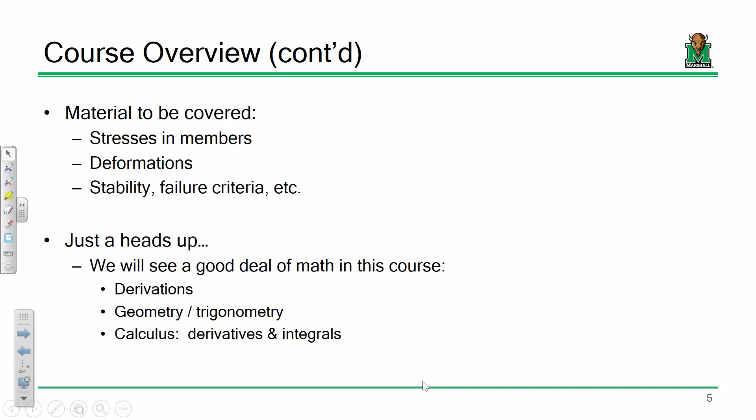So I just wanted you to be prepared for that, so when it's 8 o'clock in the morning and you forgot your coffee and I throw an integral at you, you're like, oh no, it's too early, I can't do this. Any questions so far?

All right, okay, let me pull up the syllabus because there's a couple things I do want to point out on it. Once it decides to load... okay, all right, couple things.

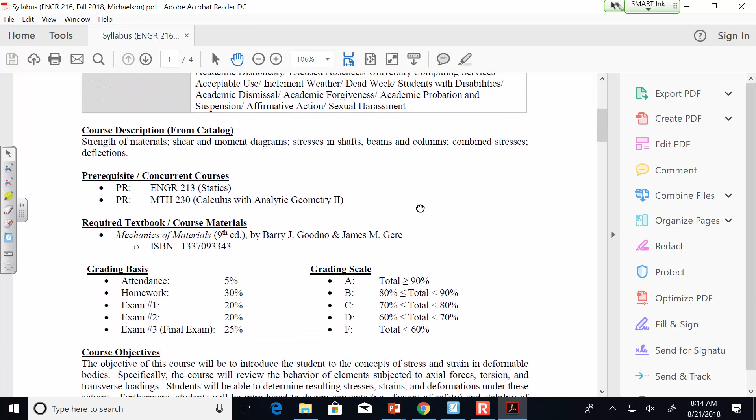So first off, when it comes to the grades, I round. So if we calculate your class average, your composite grade, and it comes out to an 89.7, you got an A, okay, so I round. And I say that because Blackboard doesn't, okay, because I have a column in Blackboard that'll calculate your class average, and if it calculates it to an 89.783, it'll say B+. So if that happens, well, hey, Dr. Mike said you're getting an A, don't worry, okay, so I round up to the nearest decimal point.

Now, if you have an 89.1, well, that's an 89 and that's a B, okay? So, but I do round up, okay? I'm usually pretty easy to get along with, and there is an opportunity at the end for a couple bonus points, and I'll mention that when we get near the end of the semester.

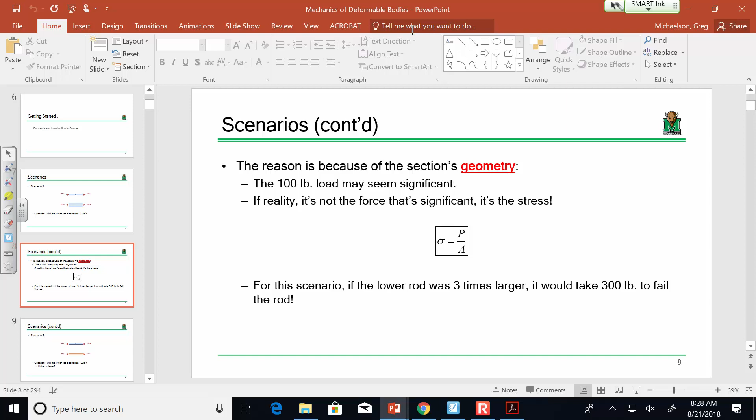Now that brings up the second scenario. I've got some numbers here too, but let me give you another example. Let's look at this. Now, let's say for the sake of discussion that these bolts are the exact same size. So in this scenario, I'm doing something a little different—I'm not dealing with an aluminum can and a bar where I've got elements that are different sizes. Now I'm taking the size, the geometry, out of the equation.

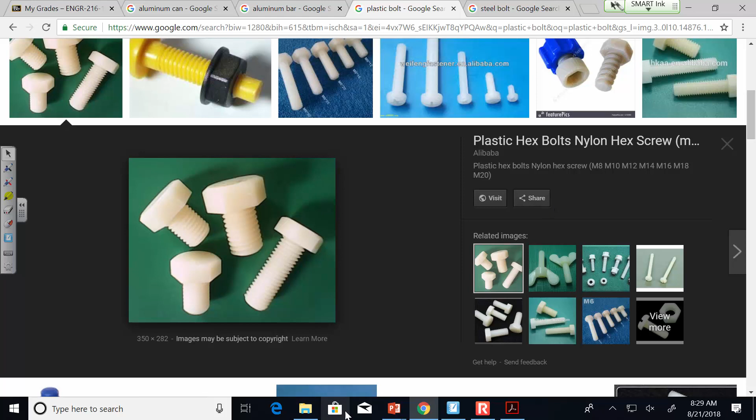Let's say we're talking about this bolt here and this bolt—let's say now that they are the exact same size, so now the geometry is the same. Which one do you think is going to fail first if I start applying load, the plastic bolt or the steel bolt? Plastic bolt, okay, and that's pretty common. Why is that? Because in general, you would think that plastic is weaker than steel, right? Pretty straightforward. So another thing that we have to deal with in this course is how we characterize material behavior—not just the geometry, but the material.

So let's go back to that scenario. Let's say I've got that rod of, let's say, blue material or what have you, and I load it until it hits 100 pounds and it snaps in half. Well, what about the lower rod? Is it going to fail at 100 pounds? Is it going to be higher or lower?

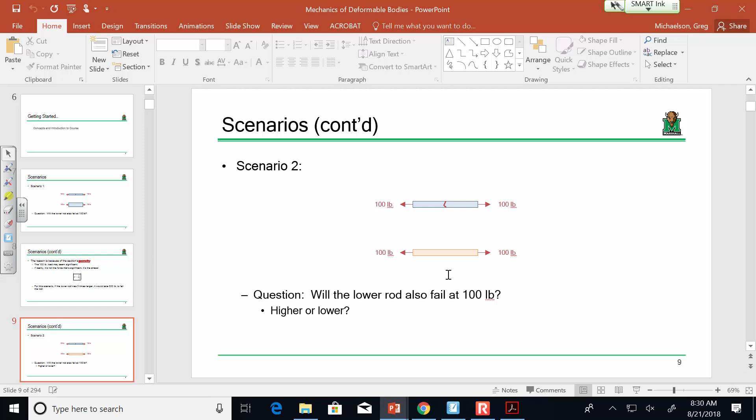Well, it depends. Is this plastic and this steel? Is it aluminum? Is it nylon? Is it what have you? It depends, okay? So the reason why it depends is because of the section's material properties. So material properties are going to affect how sections respond to load, and they're also going to affect how things fail.

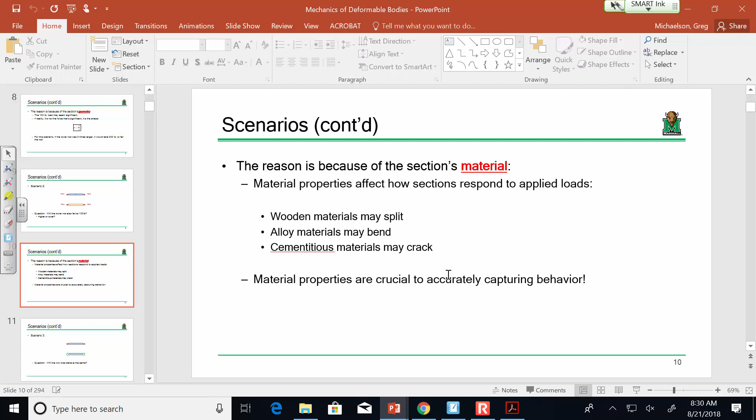Like, for instance, if I have a bolt, and just for the sake of it, let's say this bolt was made out of wood. Well, how would wood fail? Well, it would tend to split, like the fibers would split and it'd split apart. If it was made out of an alloy like a steel, it might want to bend or fracture. If for some reason it was made out of concrete, it would crack and what have you. So the way that that material behaves and the associated properties with the material are really important in capturing behavior, okay?

Now, another thing that's really going to occupy a lot of our time this semester is how are we loading it? What happens if instead of yanking on the rod, we bend it? What happens if we twist it? What happens if we shear it? Those different types of forces applied to those elements are going to cause different stresses, and they're going to fail in different ways, okay? So how elements respond to those stresses and how they respond to multiple stresses acting all at once is going to be a really significant component of this class.

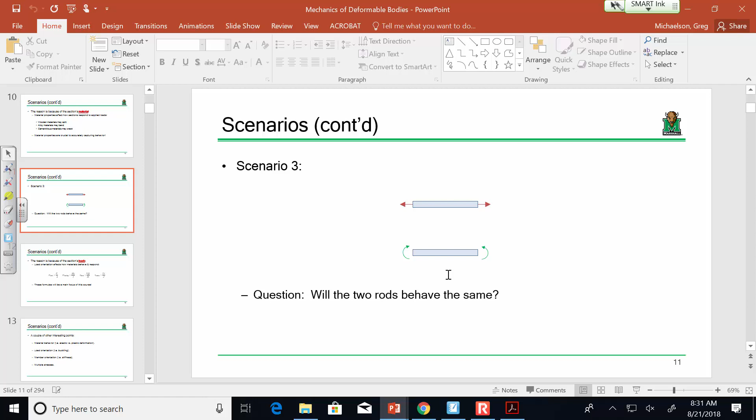But I think you'll see the eye on the prize after we do our first example here in a little bit. What I'll say about this, and this is something that we're going to investigate throughout the semester, so I don't want to get too mired in the minutiae of the course, but what I'll say is this. The way that you load an element and the way that you apply force, if we're talking about a beam in a building or a camshaft in a car or what have you, the way in which an element is subjected to stress affects how it behaves and affects its performance.

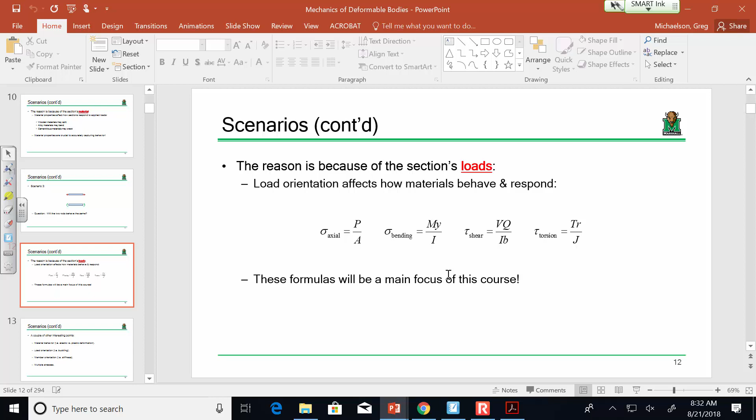You wouldn't analyze a beam in a building the same way that you would a gear in a car. Okay? They experience different stresses and they experience them in a different fashion. Even if the material properties are very similar, the resulting stresses can be very different. And how we determine those stresses is going to be a big focus of this course. So that's something I do want to mention. And there's a couple other interesting points.

The way a material behaves, and we'll talk about the difference between elastic behavior and plastic behavior. Suffice it to say that a lot of materials can behave elastically up until a certain point. Like imagine that Coke can. If I take that Coke can and just very lightly bend it, it has a tendency to want to pop back, right? But if I take it and crush it, it's not going back, right? It's stuck that way. So that's the difference between elastic and plastic behavior.

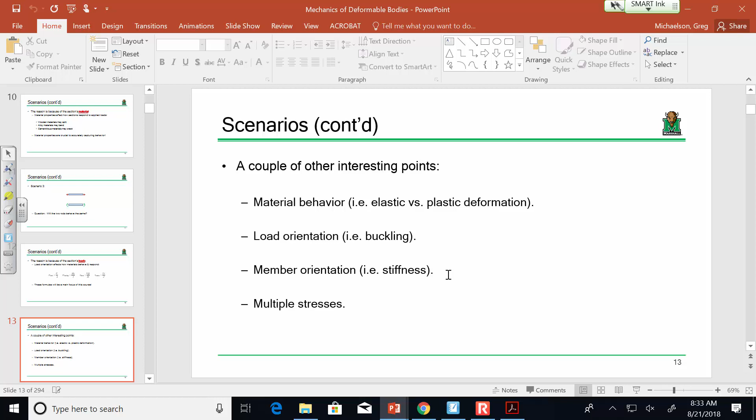Load orientation. Imagine if you have a yardstick. You can take that yardstick and you can yank on it all day long, but as soon as you take that yardstick and push it, it fails after a few pounds. That's because the yardstick wants to buckle. And so buckling is a concept that we'll deal with near the end of the semester. Things like what is stiffness and how does member orientation matter? How do you handle multiple stresses? This is going to be something that we deal with throughout the semester.

So before we get into some nitty-gritty details with the math and get into some examples, anybody have any questions? Okay. Like I said, after today's lecture, I think you will definitely see where this is going as an engineer. Let's try and get some more formal definitions of stress and get into some actual math and some examples.

Okay? So like I said, stresses are going to be a big topic of discussion in this class. Okay? So one way of thinking about stresses is stresses are a way that a body, and when I say body, it could be a beam, it could be a column, it could be a gear, it could be whatever.

Stresses are one of the ways that a body deals with external loads being applied to it. You put force on a beam, on a column, or what have you, it responds by developing stresses inside. So I'm sure you all have seen a problem like this before in statics, okay?

And don't get me wrong, we are going to use some statics in this class, and I know sometimes you can hear that word and it begins the onset of acute post-traumatic stress disorder, but don't worry, it's not going to be that bad. We're not going to see any IJK or any vectors or anything like that in this class, but we are going to use some very, very basic principles in statics to get behind our points.

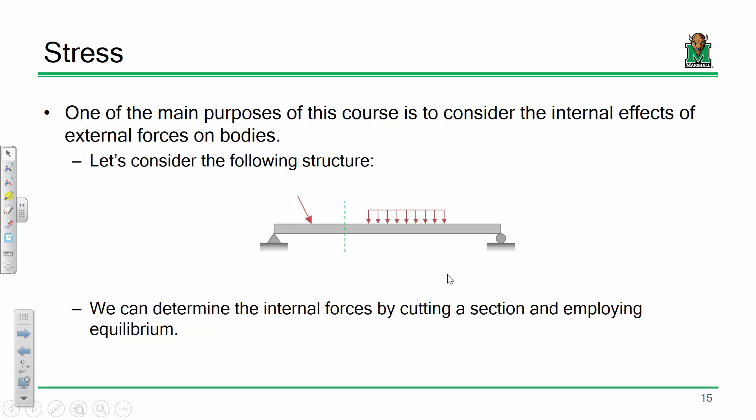But seriously though, if you cut this beam at this particular point, the beam is going to collapse, okay? The reason why is because at this particular point, there are forces inside that are being developed, forces that are meant to resist that load, right? That's how the beam responds.

Now, if you've got three equations of equilibrium, you know, sum of forces in the x direction, sum of forces in the y direction, and sum of moments, then you've got three potential forces that can be inside that beam. And how those forces generate stresses is going to be a big part of this class, so I'll leave it at that.

But suffice it to say that for our purposes here, we could develop a force in the x direction, which is acting along the axis of the member. So we call that an axial load. That's what that term P is. We can develop a bending moment, you know, bending that section, and we can develop a shearing force.

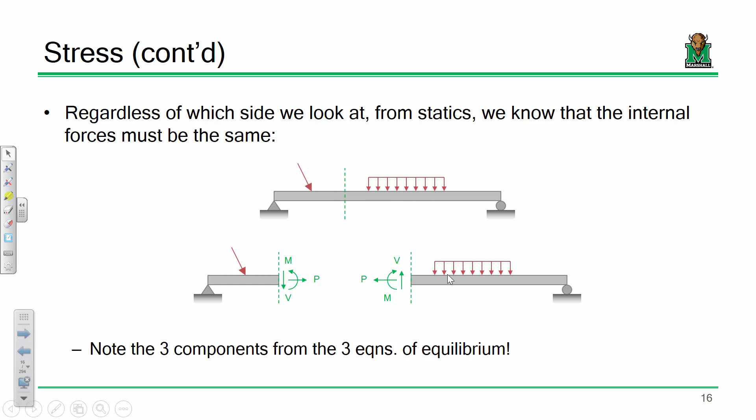And remember, this is a principle from statics you might remember, if you cut a section, on either side you get equal and opposite forces, right? So if he's got a rope and I've got the other end of the rope and we're playing tug of war, we might be pulling on it with 20 pounds of tension or what have you, but we're acting in opposite directions. He's pulling that way, I'm pulling this way. We're doing the same thing to the rope, but in opposite directions, right? Everybody's okay with that? That should be a concept you're somewhat familiar with.

Now, that's in 2 dimensions. If we were getting fancy and doing 3 dimensions, we'd have 3 forces and 3 moments. I'm not going to go nuts into the 3D stuff with this course.

Honestly, as engineers, if you were in high school and you didn't know anything about engineering, and you asked me, how do engineers deal with 3D stuff? My answer would be, we try and deal with it in 2 dimensions as much as possible, okay? And by and large, engineers do that. Two dimensions is a little easier to analyze, and there's a little more surety of the results. But we can deal with things, we can see things in 3 dimensions.

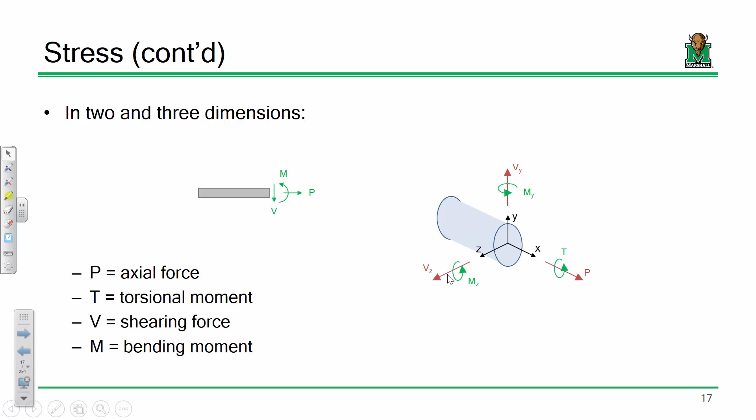I think the real big thing that is worth mentioning though for us in 3 dimensions is you can have 3 forces and 3 moments. The moment that acts along the axis of the member is acting to twist that member, okay? And so we have a particular name for that in this course. We call that torsion. And so how we deal with torsion is going to be a big component of the course to come.

Now, I think after the first couple scenarios, ultimately, we really don't care so much about forces as we care about stresses, okay? So if I want to be a little bit of a mathematical purist, okay, so you probably remember this from calculus.

You start developing the concept of integrals and derivatives and whatnot. You remember that concept of dx, right? So you've got a curve, some function of x, and you're trying to determine the value of that really infinitesimal narrow strip, that differential element, that dx. We tend to refer to that a lot in here, because the idea is if we can determine the forces and the stresses on that little differential element, we can integrate that over the member and determine the response overall. So we will see some of that terminology throughout the course.

But suffice it to say, if I've got this member and I cut a section, I can have all sorts of different forces and moments acting in all sorts of different directions. But if I'm trying to determine a definition for stress, if I look at that little itty-bitty differential element and try to look at what's going on with that element, because it's so small and so infinitesimal, I can say, for our purposes of analysis, there's really only 2 forces I need to consider.

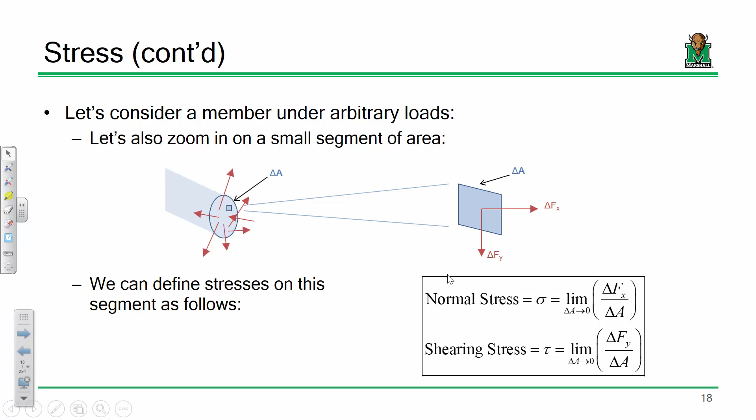A normal force, remember, acting normal to the plane, and a shearing force. So the big difference between the two is normal being normal to the plane, and shearing, I'm talking about parallel to the plane. So for those forces, again, I don't really care so much about forces, I care about stresses. So a pure mathematical definition of stress would be, for normal stress, that normal force over the area, and what is that division as the area gets smaller and smaller. That's what we're talking about when it comes to a normal stress. For normal, we're talking about the normal force. For shearing stress, we're talking about the parallel force.

Now, a couple things on units. So in this course, I'm going to do my best to expose you to both unit systems. The reason why, look, don't get me wrong, I'm an engineer and I'm an American, but I'm a scientist, and I understand that the SI system makes the most sense from a computational standpoint. I get that, and you don't have to convince me of that. We have civil engineers and mechanical engineers in this room, and whether you're working with mechanics or with construction companies or what have you, we use U.S. units in this country, okay?

It's a fact. Go to a contractor in America and tell him that you need so many cubic meters of fill. He's going to say, what? Yeah, I'm sorry, it's just the facts. A lot of our specifications are written in American units, and that can apply to civils and mechanicals as well. So I am going to expose you to both. And plus, it's going to be on the FE exam and what have you, so I just think it's a wise decision.

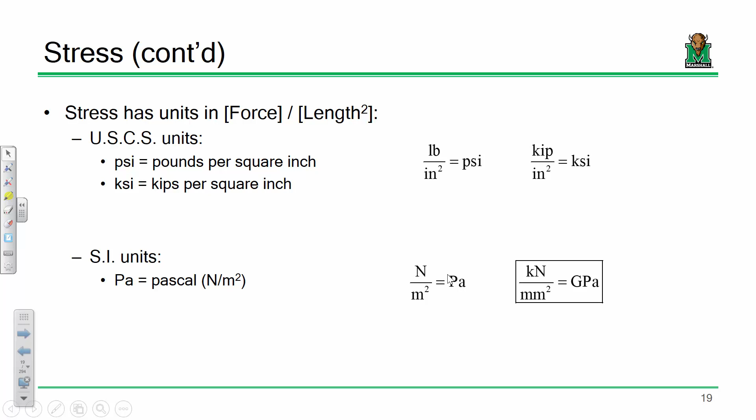A couple things. I believe you all have probably seen or heard of a kip before. Have you heard that? Okay, so a kip is 1,000 pounds. So we'll see stress units in PSI and in KSI. KSI is 1,000 PSI, so hopefully you're okay with that. And then for SI units, we'll be dealing in pascals. So Newton per meter squared, that's a pascal. And a quick shortcut, if you have a kilonewton per millimeter squared, that's a gigapascal. So I just write that down because it's nice to remember that one.

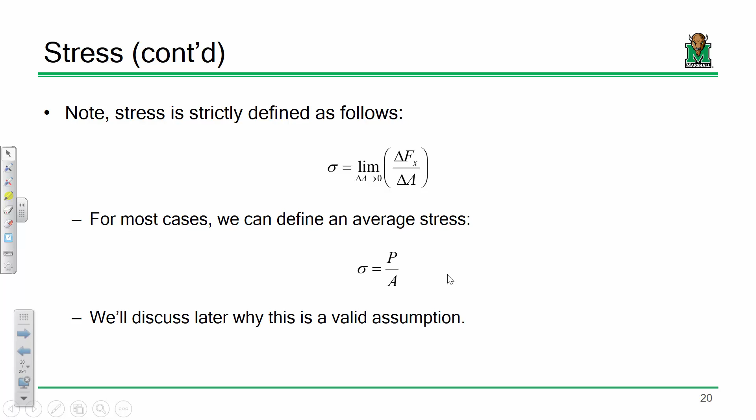Now, traditionally, if we're getting technical with our theoretical or mathematical definitions, stress is a limit. But for practical applications, more often than not, as an engineer, you're just going to be looking at average stresses, just force over area. And we'll talk later about why that's valid. But for the sake of our discussion, I will pretty much never ask you to actually perform the limit evaluation. It's just going to be P over A or similar formulas. So you can relax with that. We're not going to get into limits on day one. But we will see some calculus here and there.

Okay. In order to really evaluate what's going on with stresses and really understand it, and also to get your memories jogged and get you geared up for some of the stuff that we're going to do in this class, I got an example for us. Okay, so let's take a look at this example.

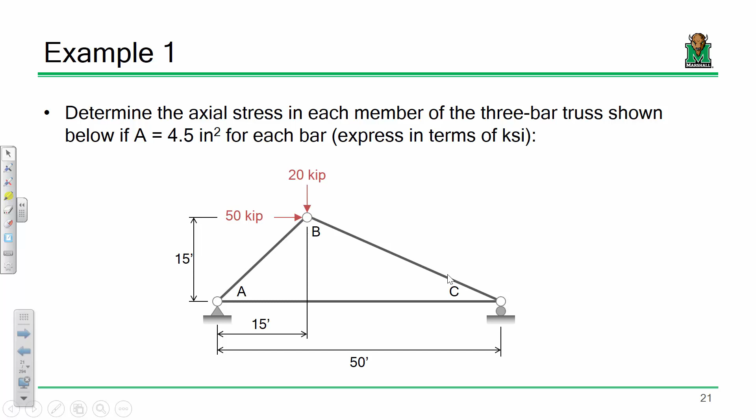Okay, I want to determine the stress in each of these members if the area is 4.5 square inches. We're going to express it in terms of KSI, and that'll be a simple approach. But this is going to be a little bit of a statics review and get us back into the swing of things.

Now let's see how my software works on day one. All right, so can you all read that? Is that big enough? Okay, all right.

So I've got this truss. I'm going to redraw it up here. We're going to determine some support reactions and do some basic truss analysis. Now I'm going to do things a little differently than probably what you're expecting in statics, and the way I present it's going to be a little different, but I think it'll be easier to follow. So let's see, here's my truss.

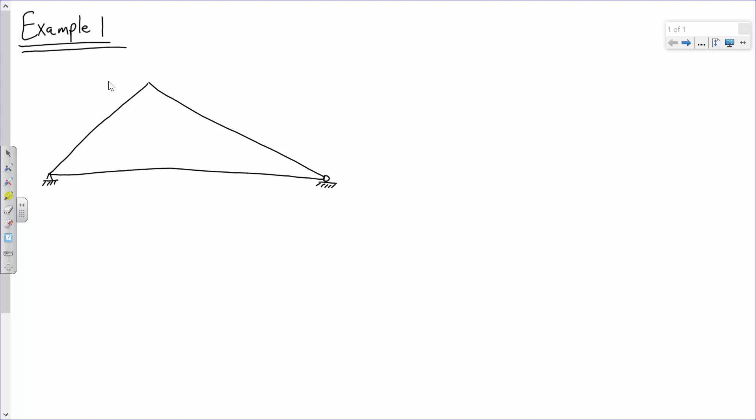And if you don't have the notes, don't worry, I'm going to reproduce the dimensions and whatnot for you. It's no big deal. So that's a roller, that's a hinge, okay. And I've got 50 kips, and I've got 20 kips. This is A, this is B, this is C.

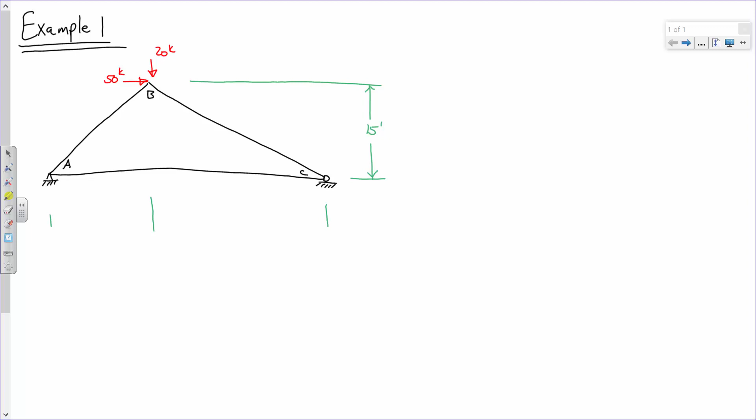Okay, for dimensions, I've got this right here. Is 15 feet. All right, this one here is split into two. This is 15 feet, this is 35 feet.

Okay, sound good? Now let's pop quiz you a little bit. So if I have a truss analysis, this is the problem I give you. What do you think the first step into performing this truss analysis is? Before you do anything, remember there's method of joints and method of sections. I know it's been a while, right? But what's the first thing that we need?

To find the reactions, there we go. Now, in order to find the reactions, what we're going to need to do is start assuming some directions. Now before that, let's take it one step at a time.

Okay, so let's look at C. C is a roller. So how many reactions are we going to have at the roller? One, and it's a vertical reaction, right? So I'm just going to draw a line right here, and we'll call that CY, okay? Again, no vectors, no IJK, none of that stuff, okay? Now, that hinge over there, that pin over there on A, there's how many reactions? Two, right? A horizontal and a vertical, right?

Okay, now we'll call that AY and AX, okay? Now, in order to perform this analysis, we need to make some assumptions, okay? So let's start off with AX. AX is a horizontal reaction. You tell me, do you think that AX is acting to the right or do you think it's acting to the left? To the left, okay. Now, what about AY and CY? What do you think is a good assumption for them? Up or down? Up, okay.

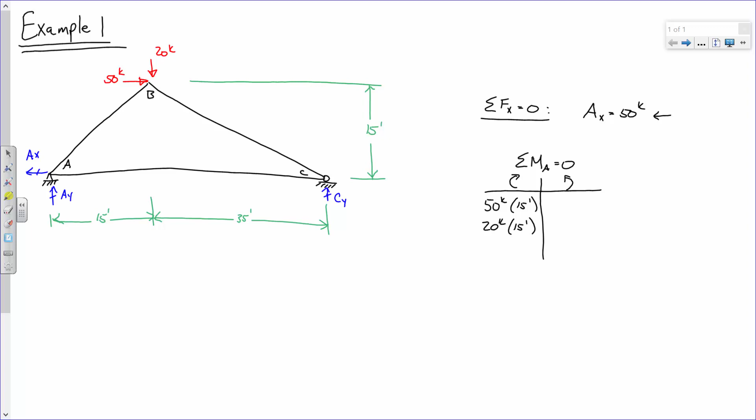Just draw a line, and then for the math, this is what we do. What is 50 times 15? That's 750. What's 20 times 15? 300. So if I add those up, what do I get? I get 1050, and that's foot-kips.

And that equals CY times 50 feet. So how do I determine CY? Divide by 50. So has everybody got a calculator on them? By the way, it's 21.

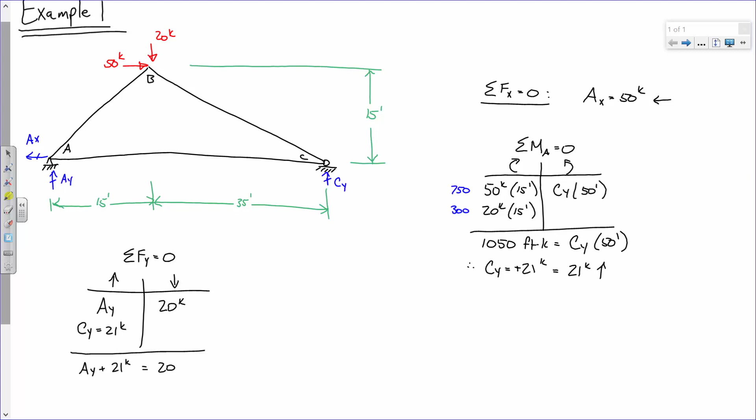So what's AY? Negative 1 kip. So if I get a negative answer, it does not mean I need to develop significant emotional distress. It just means I've got 1 kip going down. I assumed AY was going up, and I was wrong. That's all that means.

Sound good? So to summarize your reactions,

AX is 50 kips to the left. AY is 1 kip going down. CY is 21 kips going up. Not too bad, right? Pretty straightforward.

Any questions? Okay. Now we can break out method of joints or method of sections. Personally, I think method of joints is a little easier, so I'm going to do that. Before I do method of joints, I want to look at something.

Let's go back to this truss. I want to look at member AB, this one right here. If I go from point A to point B, how far over do I go? And how far up do I go? 15. So would it be fair to say that this is 45 degrees or a 1-to-1?

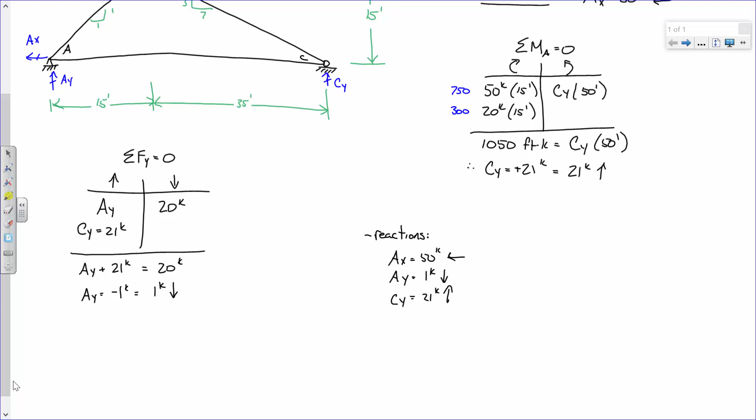All right. So if you have everything over here, I'm going to go on over to the next sheet. So I'm just going to hit the next page. By the way, I save this notebook as one big file, so like on our exam days, we can go back to what we saw, like what'd you do on example 4. So I will save all of these. Okay.

Okay. All right. Now, let's look at joint A. So let's look at the method of joints. Let's look at joint A. Let's see what we got going on with joint A.

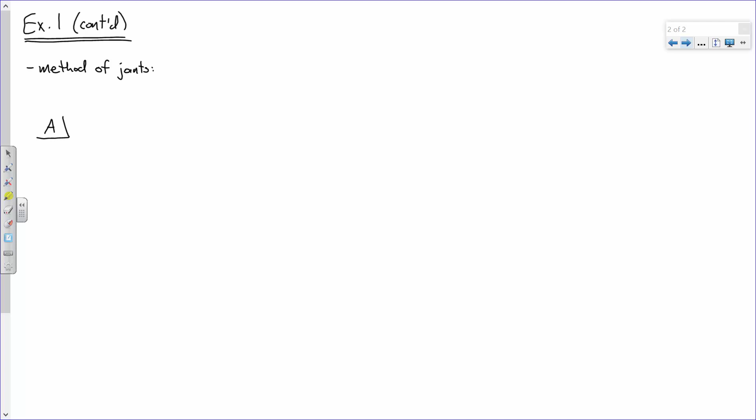So if you recall, we've got, it's a joint that looks something about like this, right? Where that member is at a 1-to-1. Okay? Now, we have some reactions. We've got, let's see, we have a 50 kip reaction going this way. We have a 1 kip reaction going this way, right? Now, the way I like to do this, the way I like to split this up is this.

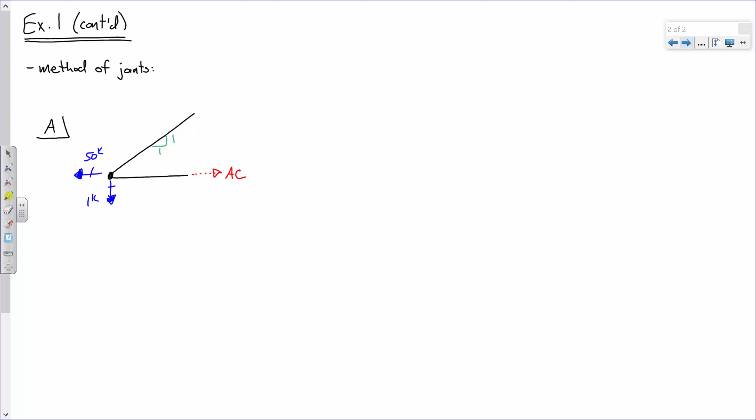See this horizontal member? It's got one force. I like to call this force AC. Now this diagonal member, it obviously has one force as well, but I like to split it up into its components. So we've got ABX, we have ABY, okay? One other thing I like to do with all of these forces, I always like to assume that they're in tension. So if I'm wrong, I'll get a negative answer and I'll know they're in compression. So if you just automatically always assume tension positive, it's really easy to know what the answer is. It's either positive and it's in tension or it's negative and it's in compression. Just always assume tension. It's a lot easier.

Now, let's take a look at this. How many unknown horizontal forces do we have? Horizontal. How many unknown verticals? 1. Okay, so we're engineers. Let's just keep this simple. If we sum forces in the y direction,

what is ABY? 1 kip. Is it acting upward? It is acting upward. Okay? Now, ABY and ABX are related, right? They are related by that slope ratio, this right here. It's a 1-to-1, right? What that means is that whatever ABY is, ABX is the same thing. If it was 1 to 2, it'd be half of it or double of it or what have you. So if we know that ABY is 1 because of that slope ratio, we know that's the case as well.

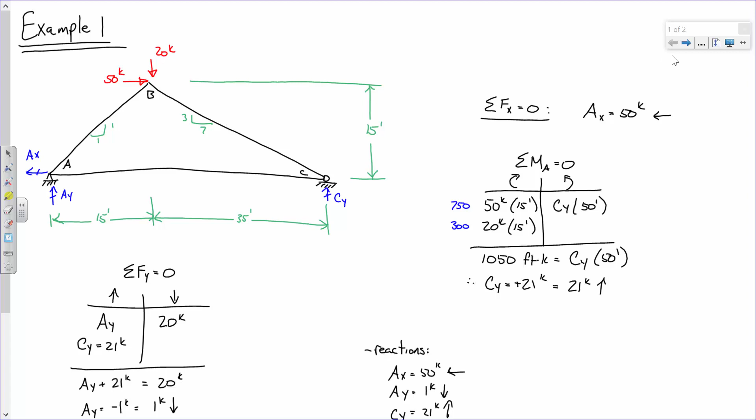Simplicity leads to less errors. So, here's joint C. What did we have? We had a...

21 kip force there. Do we know any of the forces going into this? By the way, I need to put that slope ratio on there. That's 3 and that's 7. Do we know any of these forces? Like, do we know what's going on this member? It's AC, right? And so AC was 49 kips.

So we know that this is 49 kips. Now, should that 49 kips be pointed to the left or pointed to the right? To the left. Tug of war, right? Look at AC over here. It's going this way. Again, tug of war. If he's got a rope and I got a rope and we're yanking on it, we're both putting 49,000 pounds on it because we're pretty built, but we're pulling on it in opposite directions.

All right, so this is 49 kips going this way. Our unknowns are this and this, right? Now, like I said, if you don't know, assume. But let me ask you this. Look at our unknowns. Okay, so this is BCX and BCY. What direction do you think BCX is going to go? There we go. What about BCY?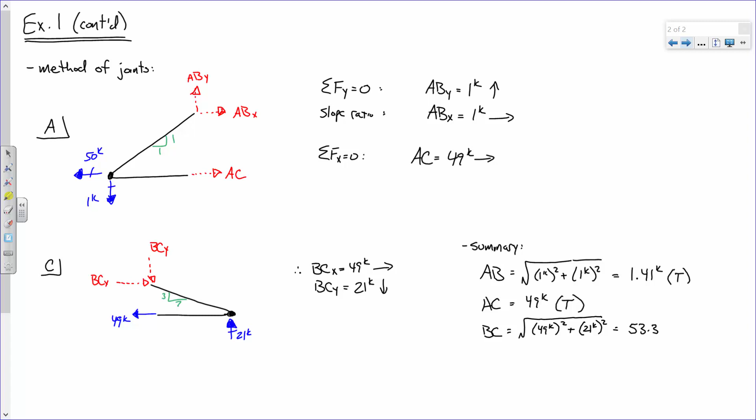We'll say 2 decimal places. Anybody got anything? 53.31 kips. I usually like to ask for a second, like if anybody else got it. Got a second? There we go.

I do that quite a bit, so if you hear me say anybody got a second, that's what I'm talking about. So, everybody okay with this? Now that's a review. Everybody, it's not that it's been a while, but with enough study, enough time, you can figure that out, okay? Here's the new stuff. Here's the new stuff.

If you recall, let's talk about stresses. If you recall, for all these members, the area was 4.5 square inches, right? Remember, it's not the force, right? It's not 100 pounds. It's how many pounds per square inch, right? Or how many kips per square inch, okay?

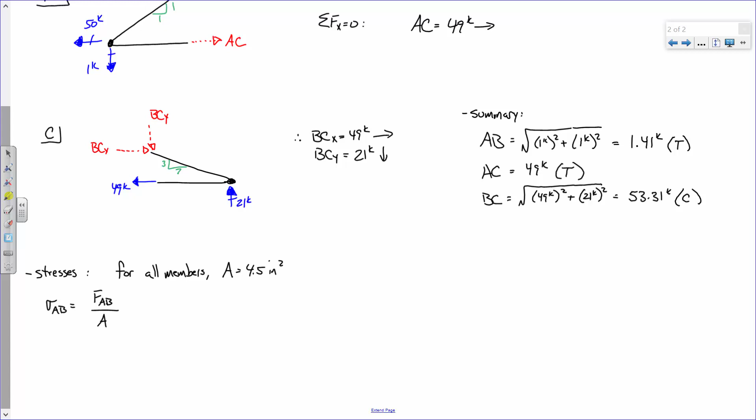So what I'm going to do is this. I'm going to take each of these forces, and I'm going to divide them by 4.5 because I want to determine the stress, okay? I want to determine the stress. And so we're going to have a discussion about that, and I think you'll see where this is all going. So let's look at the stress in AB. So that's going to be the force in AB divided by the area. So that's 1.41 kips divided by 4.5 square inches.

What is that? We'll say 3 decimal places just for the sake of discussion. .313. Now, what are the units? Kips per inch squared, or KSI, right? Now, that's in tension. I'll go ahead and put that in tension. Do I have a second on that? All right. So, likewise, does anybody have AC and BC? Anybody tell me what we got here?

So for the 10 point, I got like 889. Did I get a second on that? Is that what we got? And what about this one? Somebody else. 11.85, something like 847, something like that. Okay, is everybody okay with this?